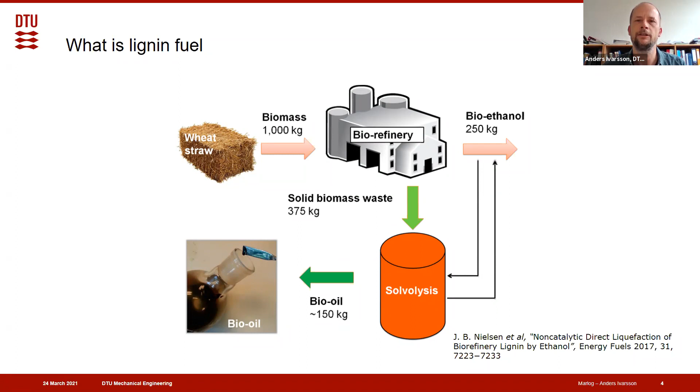The thing is that this fuel has potential of being much cheaper than bioethanol or methanol, but it's also a rather difficult fuel to burn. And if it's supposed to be burned in an engine, then the engine best suited for that would definitely be a marine engine, because it's optimized for burning heavy fuel oil or bunker fuel.

Comparing lignin fuel with heavy fuel oil, from its first appearance, it looks pretty much like each other. It's thick, pitch black, and sticky. The viscosity of it, the thickness, is rather high. And for marine engines, it's required to heat heavy fuel oil in order to reduce viscosity and achieve a good atomization when it's injected into the engine.

This is also required to some extent for the lignin fuel, dependent on the lignin concentration. It's not as viscous as the bunker fuel, but it may still need some heating. And that is when the comparison stops, because the lignin fuel also contains solvents, ethanol or methanol, which are ATEX fuels. So if heating is required with heat tracers, then you have to combine an ATEX approved fuel system and also have heat tracers installed, and that is something we would like to avoid.

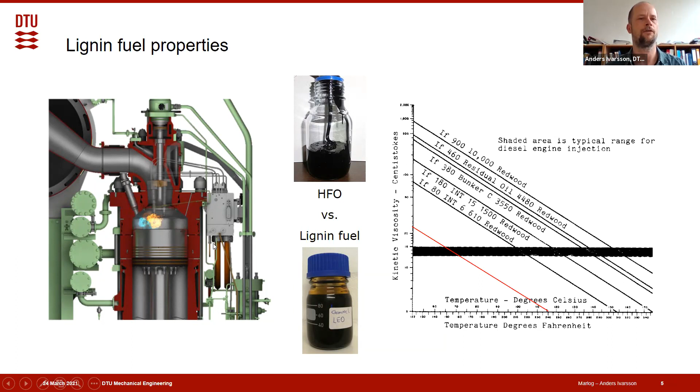So we're trying to challenge the injection of lignin fuel while reducing the requirement for heating as much as possible. We are also looking at requirements of a pilot flame in order to ignite it. This is what we are testing in this project.

We are testing very small samples, because those different formulations of the lignin fuel are produced in very small scale at the University of Copenhagen, and then they provide us with samples that we test in our equipment.

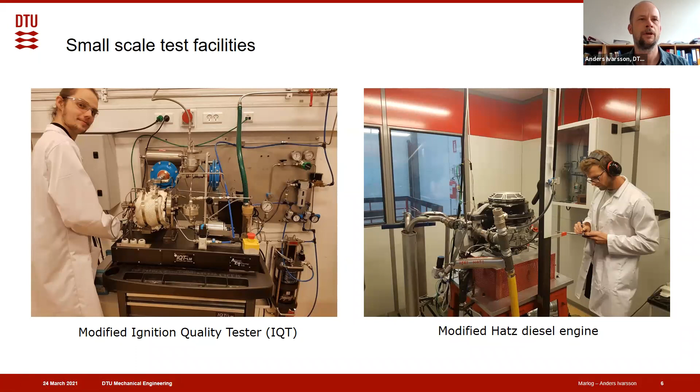Here to the left is an IQT, an ignition quality tester, and to the right is a modified Hatz engine. I'll try to explain a little more about the IQT. It's basically a combustion chamber at 45 bar, so rather high pressure and high temperature.

We have altered both pressure and temperature in order to achieve ignition of poorly igniting fuels like marine fuels. We also modified the entire injection system, because it's required to heat the fuel to some extent and pressurize it to avoid evaporation of the solvents. It should also circulate because of the heating. So it's our own design of an injection system.

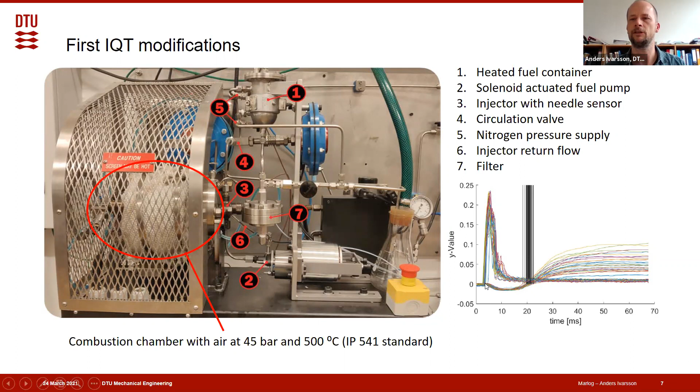Using this, we can measure the delay from injection of the fuel to the first sign of ignition. We had very promising results with the lignin fuel, showing that the lignin content actually increases the ignitability quite significantly. That's a very promising result from these first attempts at testing this lignin fuel.

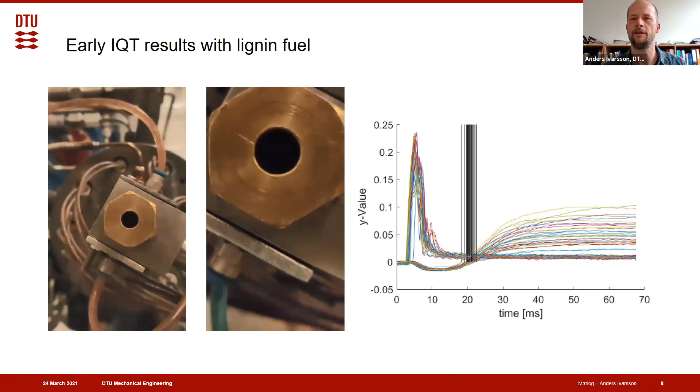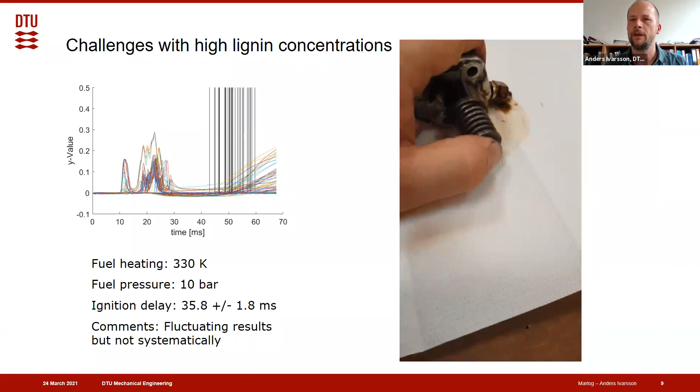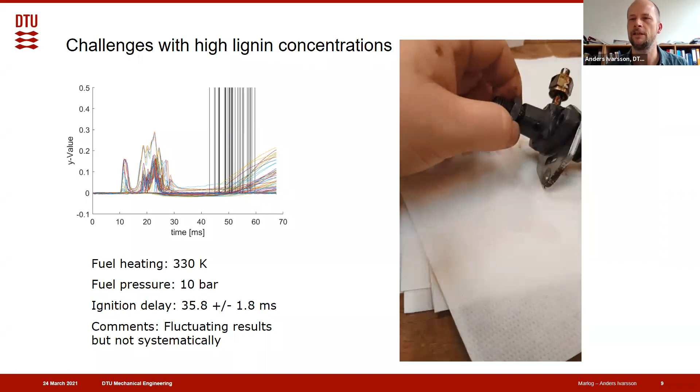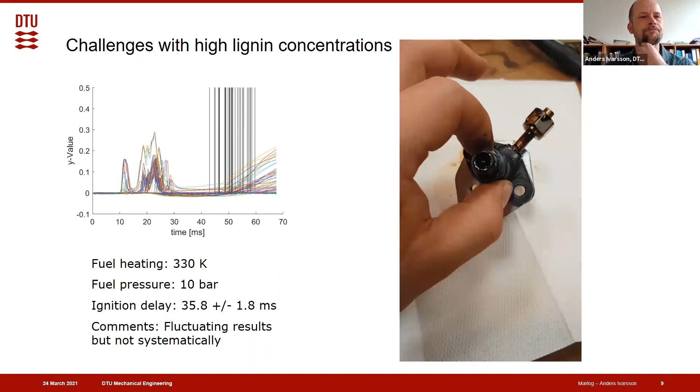However, when we went to higher concentrations, it becomes a little harder, because the ethanol evaporates from the backside of the injection pump, and a sticky substance of the lignin is left, and the plunger tends to get stuck. Also, what can be seen from the measurements is that the ignition becomes rather inconsistent.

So these are improvements that we need to make on the IQT that we are currently trying out. We created an oil chamber where we can pressurize sealing oil in order to avoid any leaks of lignin through the clearance of the plunger pump. This is basically the same concept marine engines use from MAN with methanol engines and propane engines. So it's not a new thing, but we have to improve our setup in that direction as well.

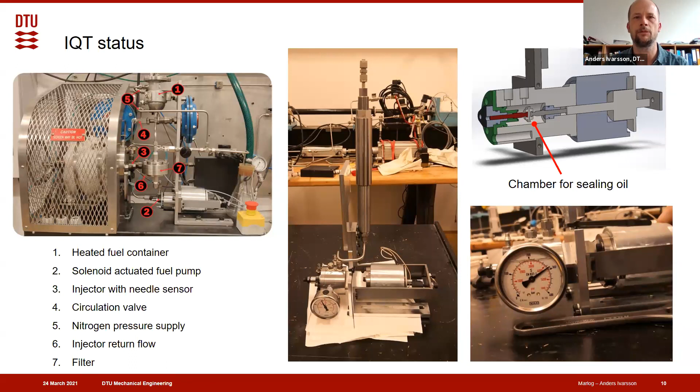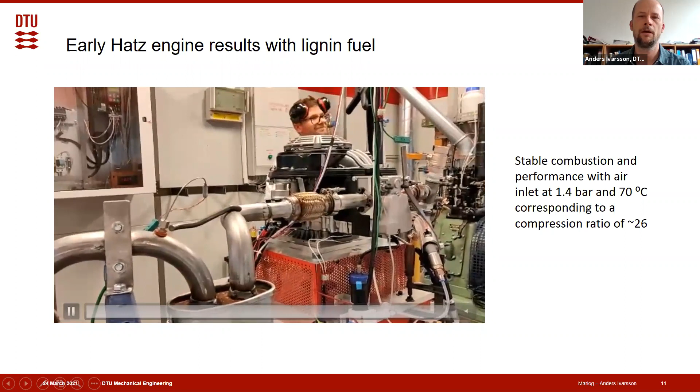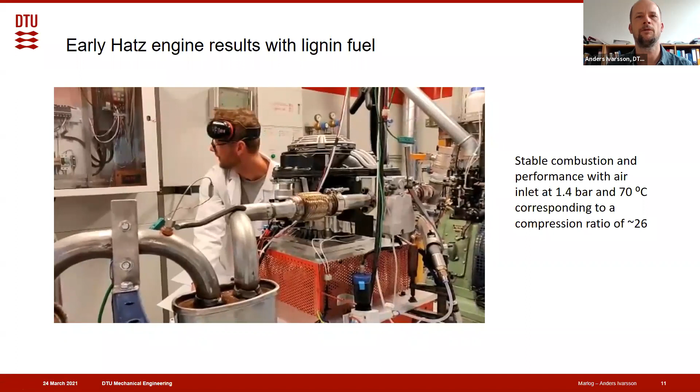That way we can run the engine and heat it up, and then try to inject a small amount of fuel and see if it burns and produces power. This is quite an important feature of this setup, because what happens if we have too many misfires of lignin is that the lignin part of the fuel builds up in the engine, and the result would be stuck piston rings and extensive blow-by in the engine.

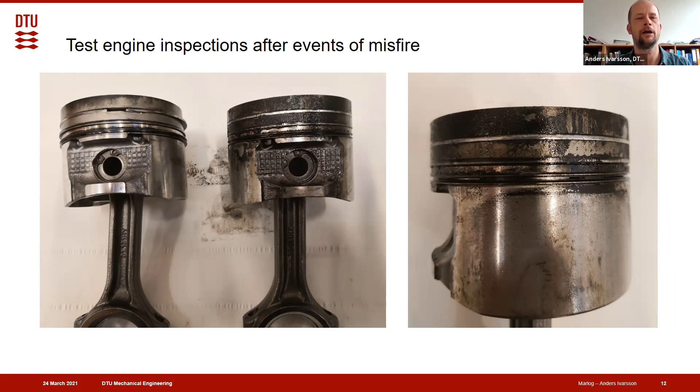So this also suggests that a marine engine using a pilot flame to ensure ignition may be the right design for that fuel. So that was one very interesting fuel, but also a very difficult fuel, as you may have noticed from my presentation. But now to another also challenging and very interesting fuel, which is ammonia.

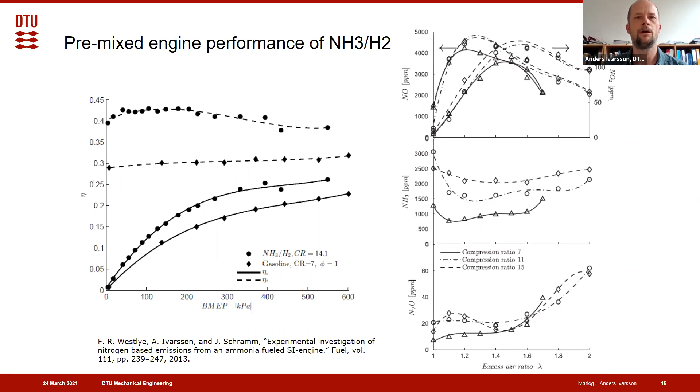So what we are currently doing in our investigations is installing a high energy spark system where we can adjust the parameters accurately and challenge the limit of ignitability of the ammonia in a premixed condition, by also pressure charging the intake more than we did before.

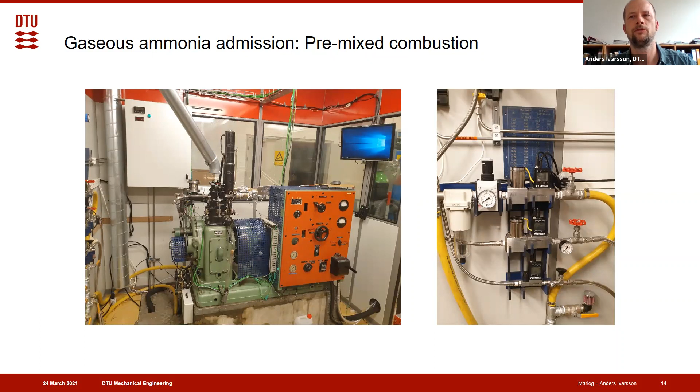And this will probably be a promising engine concept for marine application, particularly for ships where boil off gas from ammonia tanks should be used in the engine right away. However, when it comes to high reliability of the engine, then there's nothing that beats the non-premixed compression ignition engine.

And with the preheat and pre-pressure of the air intake, then we can try to burn ammonia in that engine in a non-premixed spray combustion state. However, we are quite sure that we will never get any ignition on pure ammonia in that setup because there's no pilot flame. We will, however, try it with mixing a little bit of DME into the fuel.

And the question is how much DME will have to be mixed into the ammonia in order to ensure good combustion. What is also interesting to analyze from these experiments are the emissions, how it will influence the emissions that hydrocarbons are mixed into the fuel and burned in that manner.

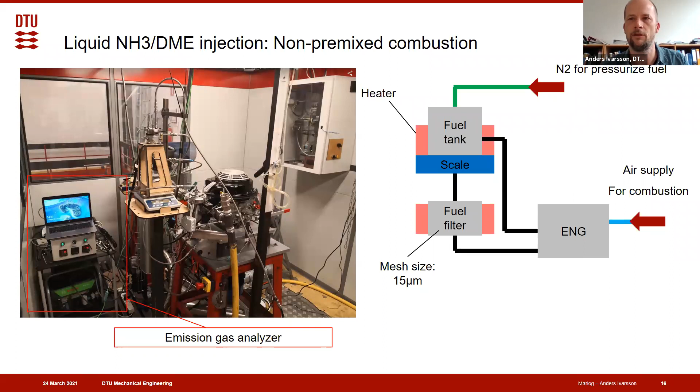But for the pure ammonia spray combustion studies, we will challenge the limits in our optical combustion vessel, where higher temperature than achievable in the engine can be simulated, and then we can challenge the limit of the ignitability and spray formation and flame formation to see if altering the spray, the injector, can improve on that.

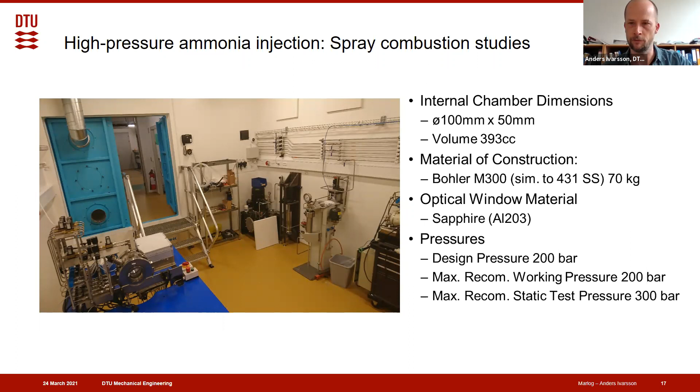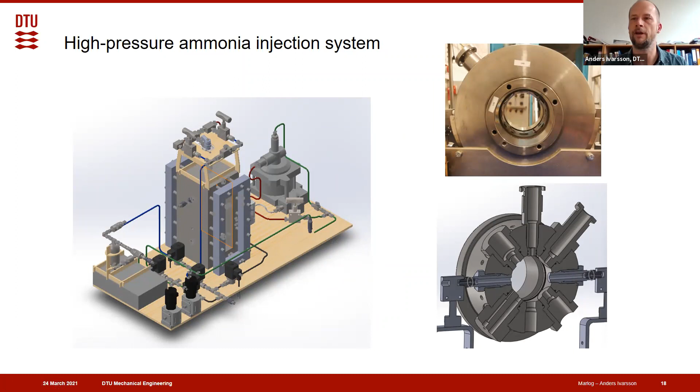So we are currently building and adding an ammonia injection system to our optical combustion vessel. And we intend to do that with both a diesel injector and the ammonia injector in order to study pilot flame ignition of the ammonia spray as well.

So that was two very interesting but also very difficult fuels. And I think they will be very specialized fuels to use. And I'm sure there will be parts of the fleet that will be using those in the future. However, for the majority of the fleet, they will probably be too difficult and expensive to use. And that's why I also would like to advocate a little bit for my absolute favorite fuel, which is dimethyl ether.

It's not known by so many, and it's not traded that much, but you may know it from your hairspray if you have any hair. I'm not using it that much, but it is used as a propellant for hairsprays, and it's good for that because it's non-toxic and it has a low global warming potential.

Now, dimethyl ether also has the property of carrying an oxygen atom between the carbon atoms, which gives it some special combustion properties. It's also stored at rather low pressure, and it does not require a lot of cooling in order to be stored as liquid. But maybe most importantly, apart from the combustion properties, is the lower heating value, which is low. And I'll try to illustrate that a little bit more.

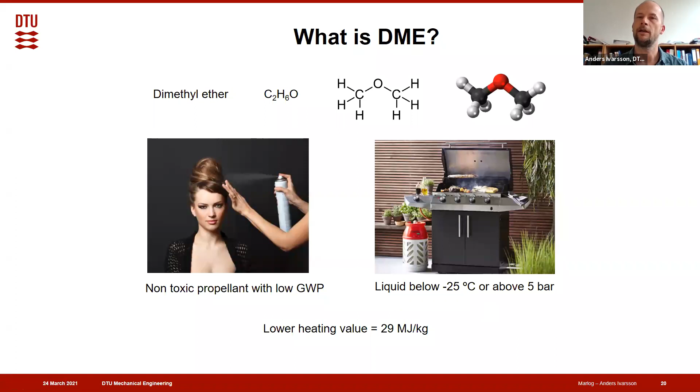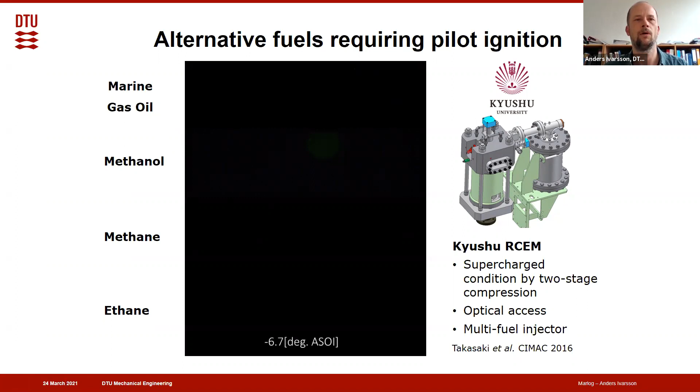But first, the combustion properties, because all other green alternatives have a very low ignitability. They are difficult to ignite, and it requires a pilot flame in order to ignite them. And the yellow flame you see here is the pilot flame, and then there's, in this case, the methanol coming in below it. Well, DME would not form a yellow flame like that because it's a non-sooting fuel, but it would ignite right away soon after injection, similar to marine gas oil or diesel fuel, which was the top one.

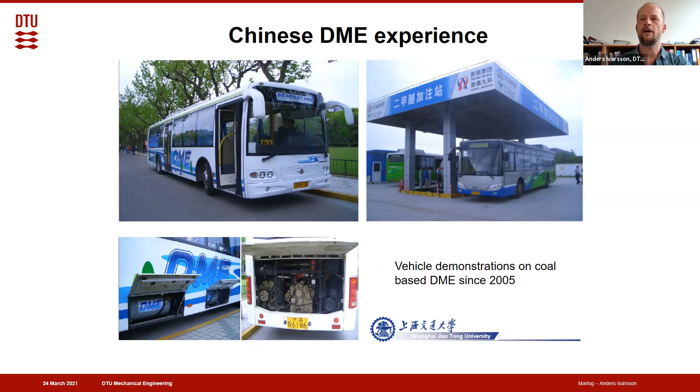That is a great feature of a fuel for diesel engines, and it's not new because experiments around the world, fleet demonstrations have shown that it's a promising fuel for diesel engines. In China, they had fleets of buses and garbage trucks driving on DME since 2005. And they actually have the largest DME production capacity in the world.

In 2015, they had the capacity to produce enough DME to fuel the entire Maersk fleet. But actually the production rate was much lower because the demand for DME in China never reached the level expected, since the reason they produced DME was to

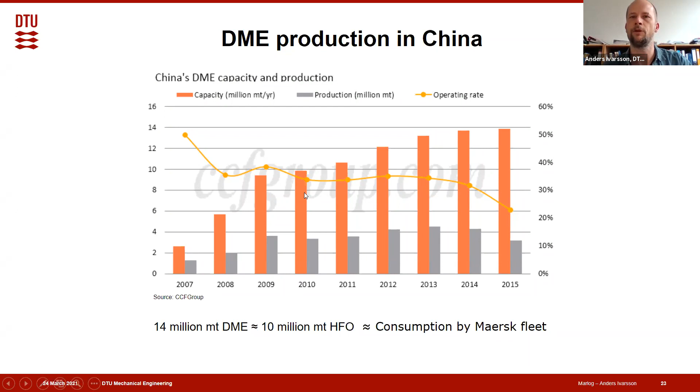reduce the dependency on LPG import. However, availability of LPG continued and prices were low, so it was hard to compete with. DME is now used as a 20% addition in cooking gas, and that's why the production level is quite low. Of course, all this DME was produced from coal because it was only meant to reduce dependency on LPG import.

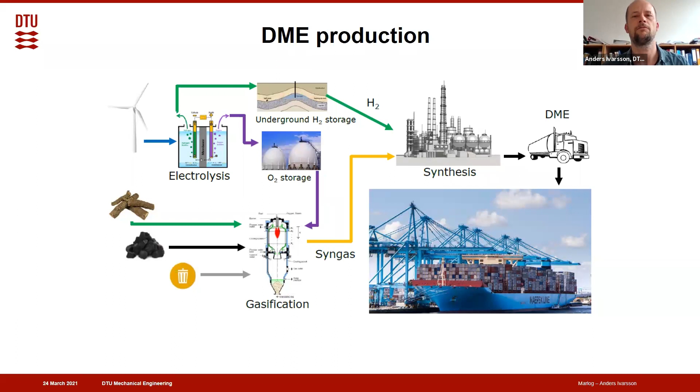But the thermal gasification process used for producing syngas from coal, and further synthesis into DME or methanol, is actually produced on the same plants. It's basically the same if biomass is used instead. And this process could be significantly boosted by adding green hydrogen to the synthesis, and oxygen to blow the gasification process to some extent. So this is what we are looking at, particularly for China.

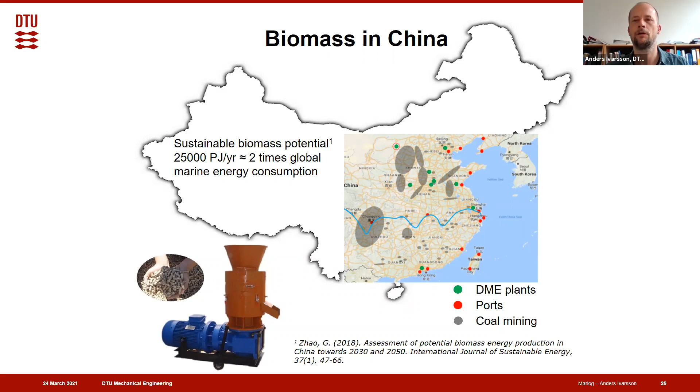So this is what we are considering, how this could be made in China. And what this map also shows is that the fuel of the future will be produced in a very distributed way, not only in China but the entire world, wherever we have sustainable energy, either biomass or wind energy, and then it will have to be moved around. So that is changing the picture from large fuel suppliers using

bunkering systems, and that is what we are considering if in this future we have a more mobile system using tank containers. Then it would change the situation so that fuel traders could buy some tank containers containing this new fuel and deliver it in the harbor. And when ships are, for example, unloading containers, they could load the amount of fuel they need for the next part of the trip. They could be connected with quick connectors, like the one shown there.

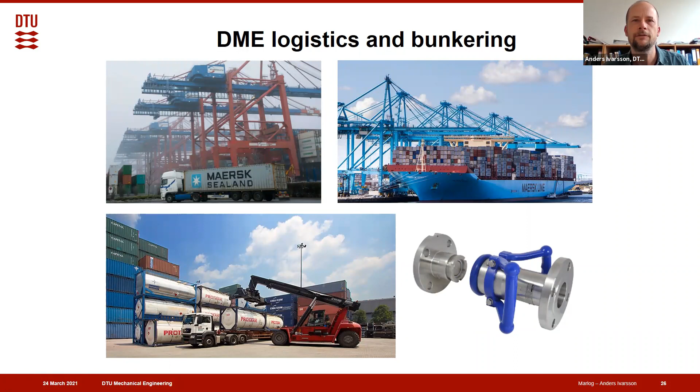So that was a little bit about logistics and bunkering, and considering this, we should also take into account how it will influence the cargo space capacity and payload capacity. If we do this using either ISO tanks, which are approved for LPG, DME and ammonia, or T11 tanks for methanol, then we can get an idea about the reduction, how much cargo space needs to be sacrificed.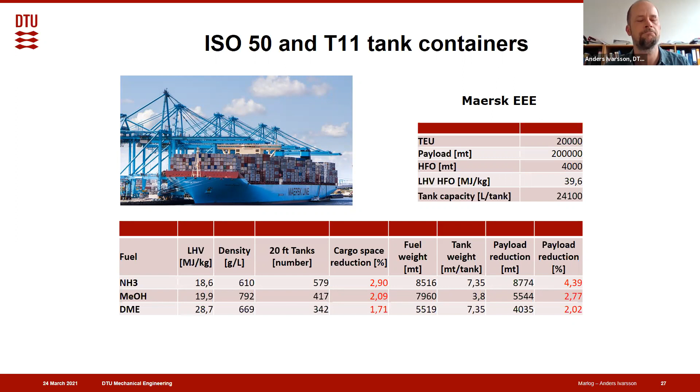And then the advantage of DME's high energy density also shows, because the sacrifice will be less when using DME. It will be less than 2% reduction in cargo space, compared to maybe 3% for ammonia if stored in that way. And that's only on the ship. You should also consider the entire infrastructure of trucking fuels around on the roads and everywhere. So I think energy density is a very important factor to consider here.

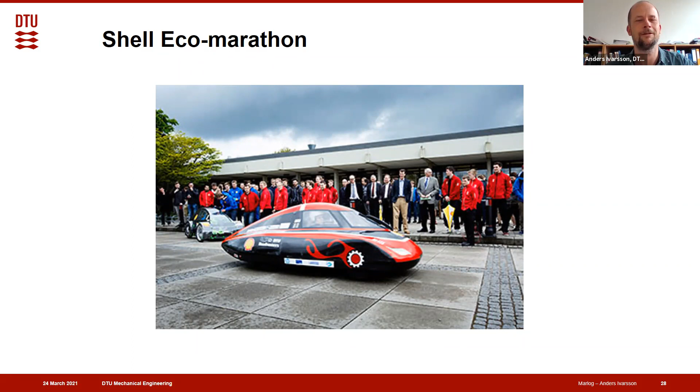Now, as a final thing, I would mention that we participated quite a lot in the Shell Eco-marathon at DTU, and in the early days we were also allowed to use more advanced fuels, and we used DME. I think that was the nicest engine we ever built, because it was a modified two-stroke engine using direct injection of DME with compression ignition. I thought I would share with you the nice accelerator response of that engine, because it's a fantastic fuel, and you immediately fall in love with it when you use it in engines. I'll try to share that feeling a little bit with you. So, coming here.

Yeah, it sounds like a race engine, but actually it was a competition about reaching the longest range on a liter of gasoline equivalent, and that particular engine did 589 kilometers on a liter of gasoline equivalent. So that's it.

That sounds just great, Anders. I'm just getting back to you here. Hi again, Anders, we're back. I didn't know that you could fall in love with a fuel or an engine. Then you are passionate about your job.

It was really interesting for me, who doesn't know anything about engines or marine fuels at that level that you do. I didn't understand 100%, but I think you gave a very good overview of the pros and cons of the different fuels. That was actually what I wanted to ask you, but in the last slide you gave a great overview of the different characteristics of the fuels. My other question was, what is your favorite fuel? But that was also obvious. There have been some other questions in the chat, so let's dive into those, as I have no more questions for you. You answered all of them, Anders.

We have Lene Mahler asking, what is the current price of DME compared to other marine fuels? Yeah, the current DME spot market price, on an energy basis, is the exact same as methanol, because it's produced on the same plants. However, it's not green, because current methanol production is not green, and neither is DME, and ammonia is also pitch black today. But if you look into what the price would be if it was produced green, it would also be the same as methanol, but more expensive than the current price tag, of course.